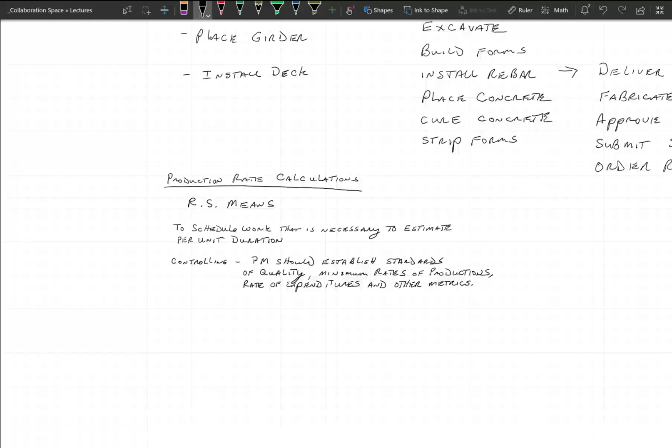Especially because in Part C, our three trials all had different temperatures, so technically you've got to do all the calculations for each one since the temperature's different. How did we get something that changed that much? We had one trial with 19, 20, and 22 - someone must have had hot water. Next time we should get a really big beaker we can just pour it all out of, I guess.

Cool, I suppose, that's not impossible. Hydrostatics - new lecture. Cool.

That's this thing. All right, anybody have any crazy ethics questions before we start, or anything else that's complicated?

No? Why, I can't understand. So there's four electrical students that are finally going to show up on time. That many have been missing? Yeah, because they were supposed to go to the lab at 9 o'clock and come to the lecture at 10, then go back to lab, but then their National Electrical course appears on their schedule at 9 o'clock, and no one paid attention to that.

So I literally was like, okay, look, we've got to get this sorted out. So I just sorted it with Mr. Havens, and we've got to do that bit yet too. So what did I do with my notes? I grabbed the wrong set of notes. This is going to suck. Okay.

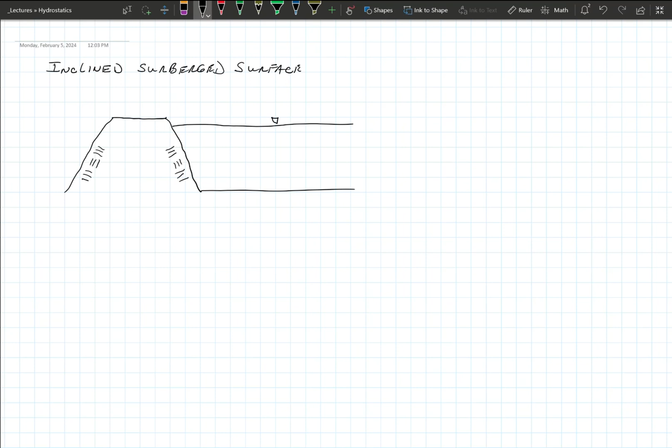So we've got water over here. We've got some height Z. We have an angle theta here, okay, which also, by the way, is the same theta down in here. So all that fun stuff you learned in geometry is coming to pay off, and it's going to haunt you until you're old and gray if you don't remember those things. All right, and what we're looking at is the water acting on...

Oh, perfect question, sorry. Oh! I want everybody's...

Should I finish? You can finish. Oh, yeah. No, sorry.

Just watching Leo over here make some of the nicest drawings.

It's funny, I love my Surface, but the Surface 8, the pen became sloppy on inclines. My old 4, I could draw perfectly straight inclined lines, and I don't know why I can't do it on this one. I usually want to use a ruler, but it didn't want to play with me today.

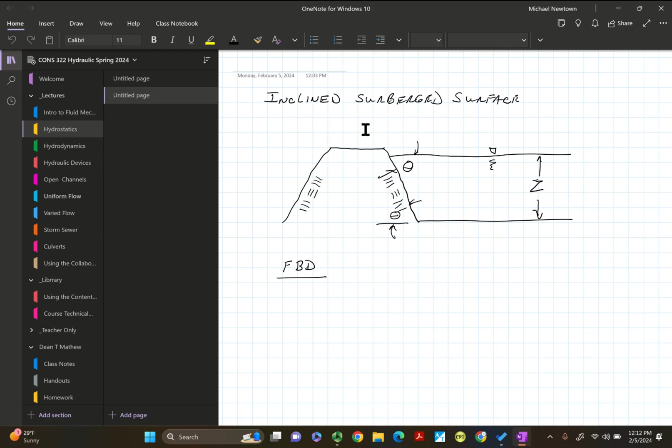Yep, I want my ruler in the world's worst way. Go away, it's not going away. Something that I did this morning when I was in the interviews with the dean. Just didn't want to shut down properly. Yeah, does that get a little complicated? Hey, why? Don't ask me.

All right, so any job worth doing is worth doing right. So there's our inclined surface, okay, and that's 60 degrees off from there. Actually, I'm going to put it inside so we don't get confused with all the other arrows. Okay, now we have point A here, which will be the base, and we got point B up here, which is the surface of the water.

All right. Now, I know Dr. Regal likes to have spreadsheets in colors, but I really like to have other things in color. So anyways, we know we're going to be perpendicular to the face here, right? That didn't go, that blue? Yeah, okay.

So there's a pressure, right? And we're going to keep going up along this, but I'm going to cheat, okay, just for drawing's sake. So if this is 30 degrees, our pressure is going to be doing this the whole time, and it changes with our depth. And just like with a vertical surface, we'd expect it to be less on each of those. So we literally got all our pressures at some depth Z.

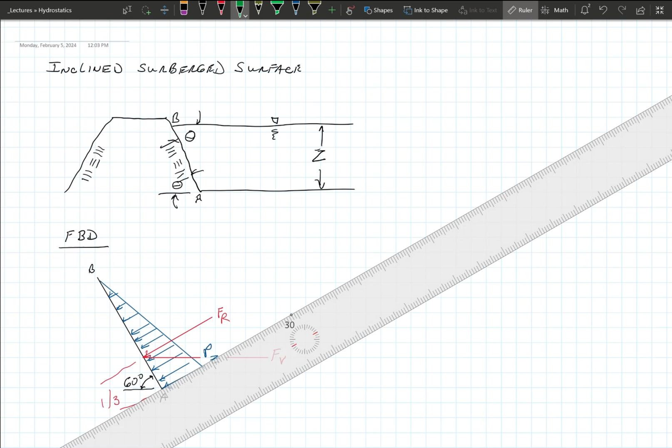Okay, all right, let's get this a little higher on the screen so I can draw. So we come off point A and we go up to point B. Okay, and Z here is equal to L sine of theta. Okay, sorry, I did that wrong, I want the L first. L is this distance here. Okay, so this is 1/3 of L off the bottom.

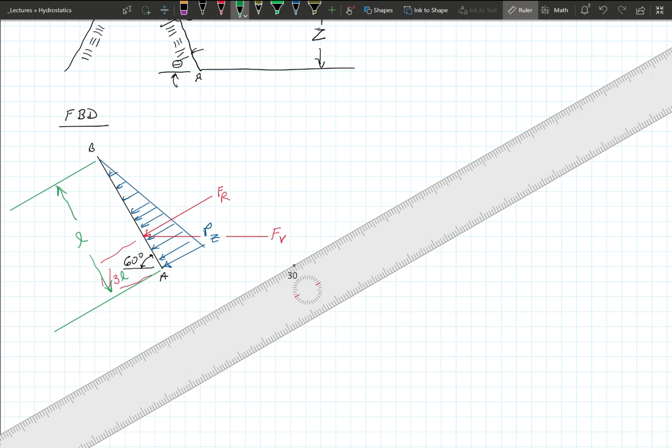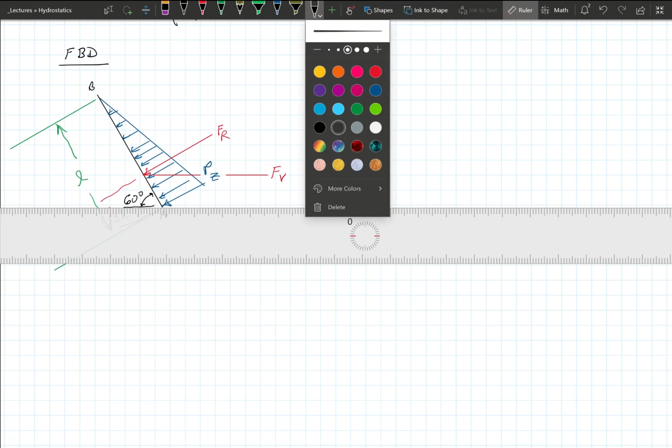All right, now I got to get... Oh, we need another color. And just in honor of Dr. Regal, we'll use purple. Yeah.

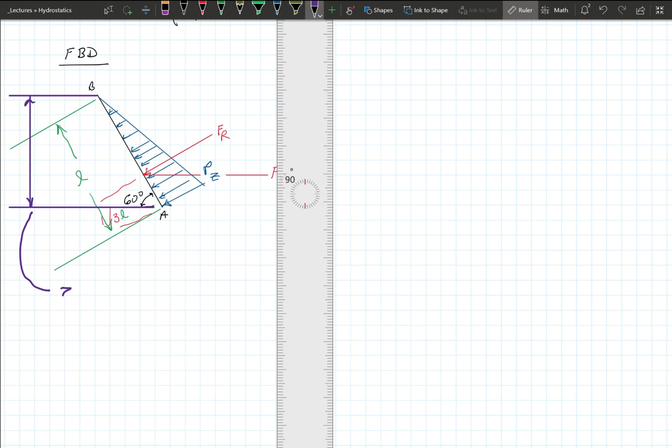And this is going to get messy, so I'm going to come down here. Z is equal to L sine of theta.

Okay. All right, so what's going on here?

Ideally, we have two forces that we can come out of this pressure stuff with. I'm going to show you some equations here in a minute. We got all the dimensions that we really need to have. There's one thing missing, though. Anybody thinking about this from a purely static standpoint?

So we got a weight of water at that point. Now, does that look like we got all our forces and everything that we could possibly account for, reaction-wise? As long as we're on this planet, it works.

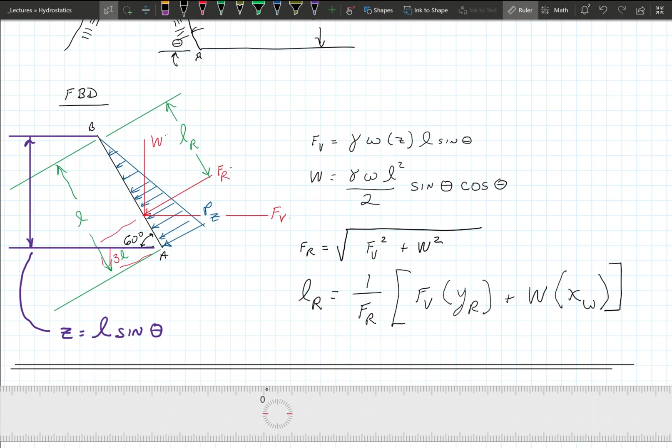We're going to, oh, this is a good question. I asked this in height construction, so half of you will get it. This is the best way to tackle this elephant, one bite at a time.

Okay, so we're going to do submerged surfaces. We're going to do vertical, we're going to do incline. So we'll get some practical experience for this.

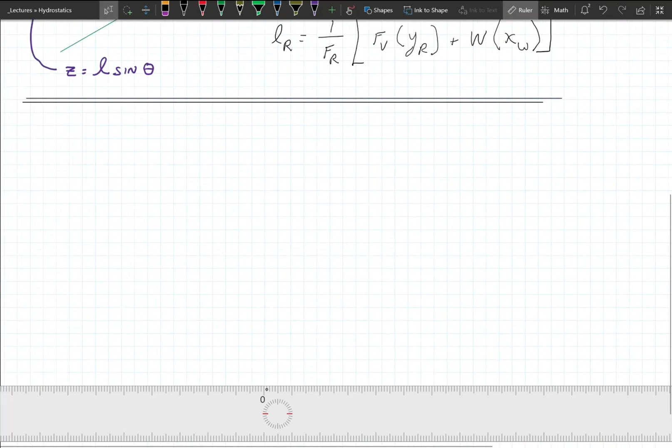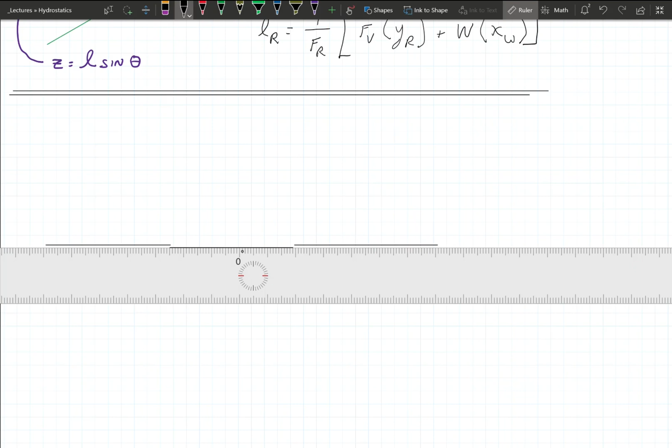All right, let's try one here as an example. So... really? Can't make a 90? Fine.

And we are going to be 20 feet below.

Glass window. Oh, and yeah, this one's going to be fun. Salt water.

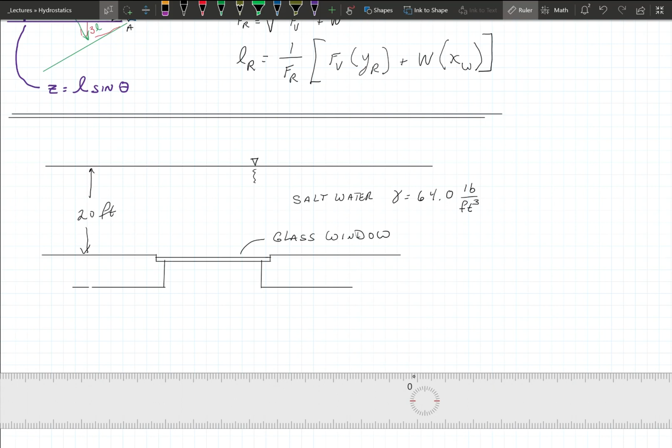Reminds me, Dr. Regal, remind me after we get done here to tell you about the geologist I watched the other day on the formation of salt domes in the Gulf, on the Gulf Coast. Really cool. I don't remember his name right now, but I got him logged onto YouTube. So it was one of those, YouTube just presented him to me. It's like, I'll watch that. And when I got done, it's like, that's intriguing.

All right, so we got a window here that's 18 feet.

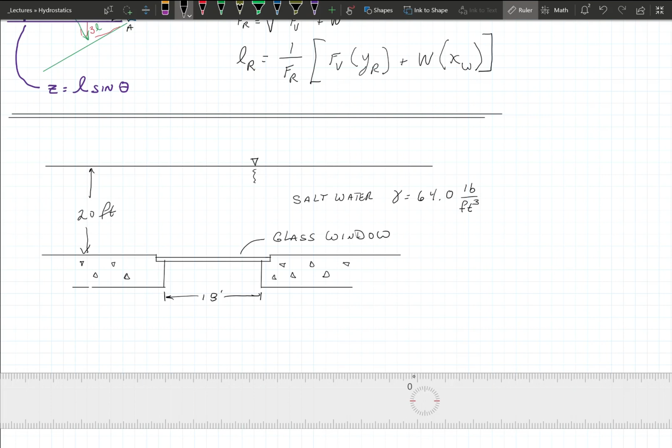All right, now, and you guys need to know something about this because we definitely need the areas out of this. So think about this window sitting in the bottom like so.

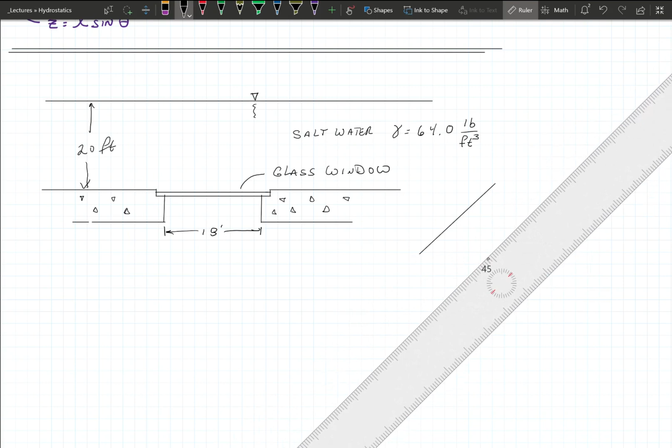Oh, get out of there. I'm having way more fun today than I thought with this. 18 feet, yep, so we're 18 feet here, but we go back 16 feet there.

Mind you, I would never purposely build this structure. Somebody may want to, but I wouldn't. Why not? I don't really care if the whale's over my head and I'm looking at it, and if the glass cracks, I won't be there to appreciate it. So, no, I'm not designing this, but it gets the point across. Okay? So...

For, oh, that's a question. Okay, oh! There goes the time. Imagine there's water in this and there's pressure on the glass. If there's a whale in the tank, does that increase the pressure on the glass?

No. Well, then why does it matter if there's a whale in there? Because if the glass cracked, the whale's going to come through that hole, and I'm telling you, that whale ain't going to fit. It'll plug up the water, so there's probably a chance of surviving, but the whale's going to be mush.

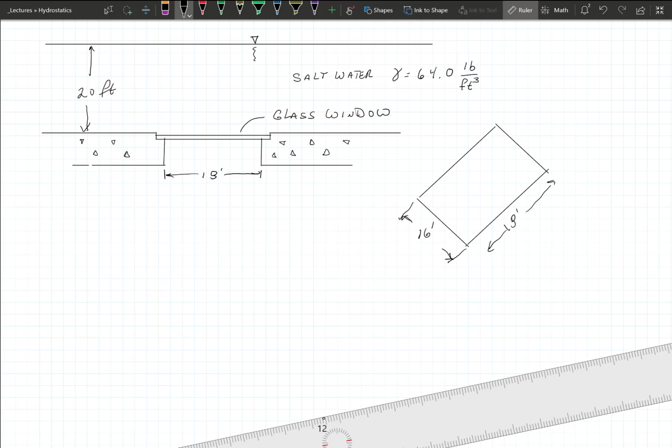Find force and the center of pressure on the glass.

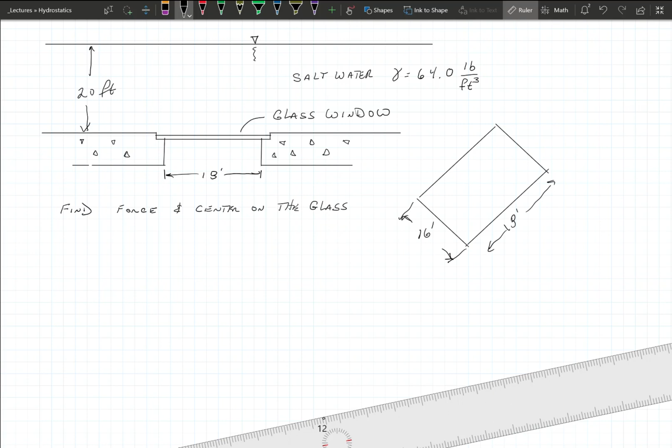Okay, oh yeah, this is my favorite example. This is the one that goes step by step. So guys thinking logically, here's the way to do this. First thing we're going to do is go find the force, and we're going to use FR because that's our resultant.

And we're going to put it in as this. Okay, and the reason I gave you the salt water as 64 is because you know that - if you used 62.4 you'd be off by something. But in the world of engineering we put factors of safety in, so you're probably going to be okay. But you might as well use the right numbers, so 64 pounds per cubic foot.

Remember the cubed - we're going to multiply it times Z, our depth, which is 20 feet, and we got our 18 feet times our 16 feet. Recognize that specific weight times Z is our pressure, and that the length times the width of the glass is our area that it's acting on, right? No violation of statics there so far, just some weird units to get there.

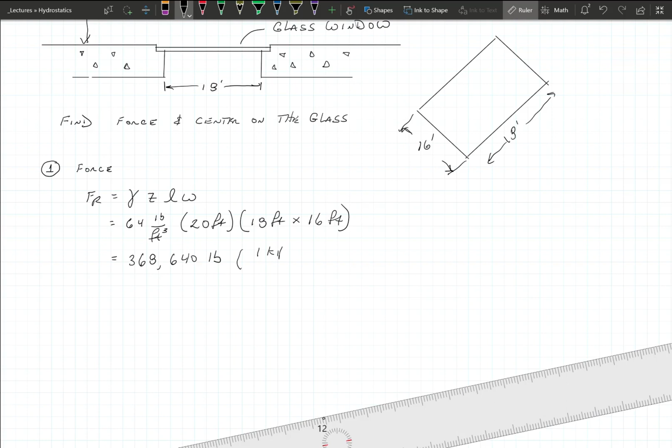Now, to keep you consistent with the world of engineering and the civil world that you're in - I used to gripe about this and then I gave up - so 369 kips. Something you can relate to? Still a lot of water overhead.

So if I have a force at the center of that glass, it'll be 9 feet in from one edge, and then on the 16 foot side, 8 feet in. That's where the center of that force is. Do we wind up getting a beam reaction that we can calculate?

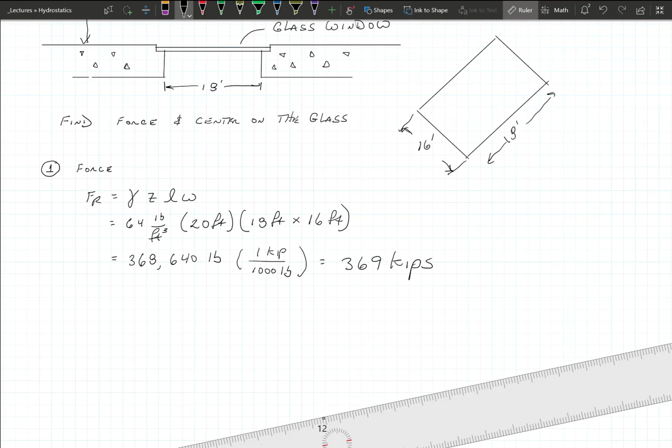So just think about this for a minute. FR, and we're 18 feet this way - can we calculate the reactions on each end? Yeah, in this case it's really half of the 369 kips that the concrete has to resist.

And then you can go even further and start thinking about it from the 16-foot way. Now I guarantee you, twisting that 90 degrees and calculating the other way, it's going to be stronger just to calculate the 18.

But as long as we're having fun in engineering here - no one ever puts the grand picture together, it just pisses me off all my life. One 18-foot beam's cool, but when I got a big plate in there, I got to go 16 too. I got to check that one too, so do your due diligence.

It's going to take you 2 seconds to do the math, but you check the other way to make sure that one's as strong, and whichever one's the dominant one, design to that one. Because why make somebody else's hell? Oh, on the 16-foot wide we only need 4 inches of concrete, while on the 18 foot side we need 16 inches of concrete - why would you make them form something in that weird shape? Don't. Consistency - make it simple, make it easy, use the largest thing to hold up everything, call it done.

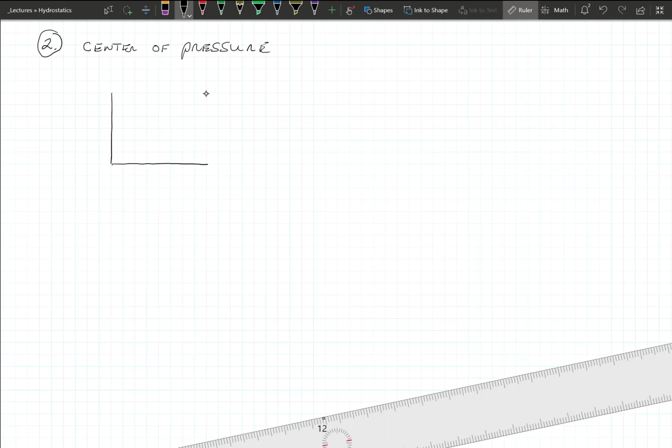I think I already gave this part away, but we're going to have fun here anyways. So we're 16 here, we're 18 feet there. So we're literally right there. Okay, makes sense to everybody? That one wasn't too hard to calculate.

And in the process of biting off big chunks of elephant, this case is easy to take care of. Yeah, drowning in seawater of - well, you know what happens in aquariums, right? All those animals excrete excrement out into the water, and they actually put divers into those tanks to scrub the algae off the side of the tanks.

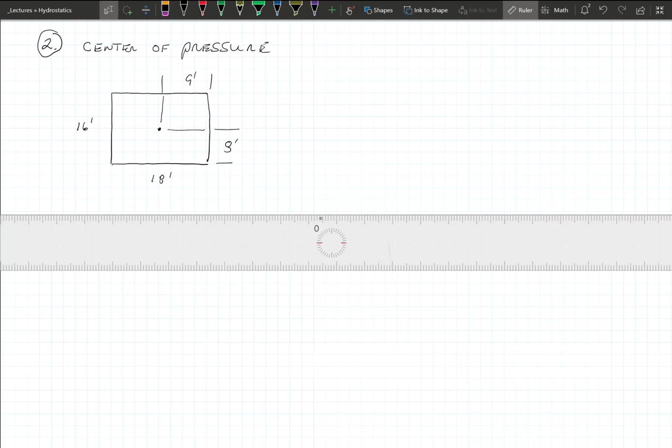Okay, so far so good. Let's do - oh yeah. We doing time here? We got good time.

All right, no one's ever built this structure in their lifetime in engineering. And the other bit is, might as well get this. And there's our concrete.

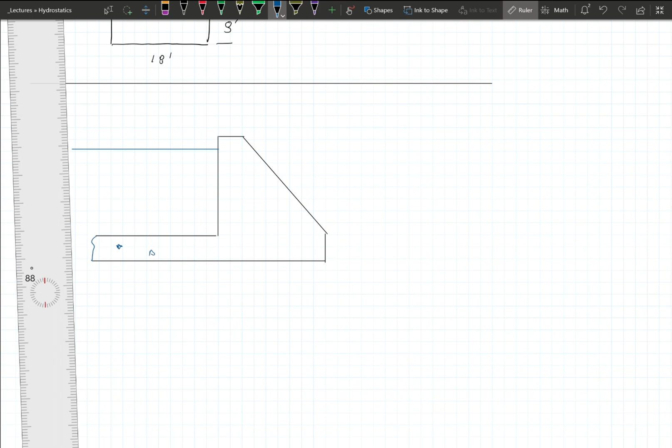Kids have all survived the whole harassment in your freshman year. What's the difference between concrete and cement? Yeah, cool.

All right, so we literally have got a Z depth here equal to 25 feet.

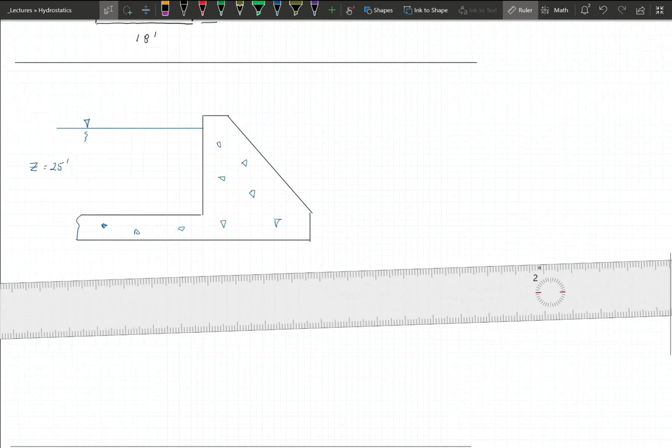Actually, I know how I got onto that YouTube site. I was looking at Lake Shasta in California. It's getting to the point where enough of that atmospheric river is dumping rain there. That is like 80% right now. And usually at 72%, they start opening the spillways, so they're concerned that the Bureau of Reclamation isn't doing their job well. So, all right. Anyway, so then I was like, oh, what's the next one here? That's cool. All right. We need to deal with some things here.

And all right, so remember, it's a triangle. So we're going to come up to 1/3 off the bottom. And that's going to be YR, but we got a YC to deal with.

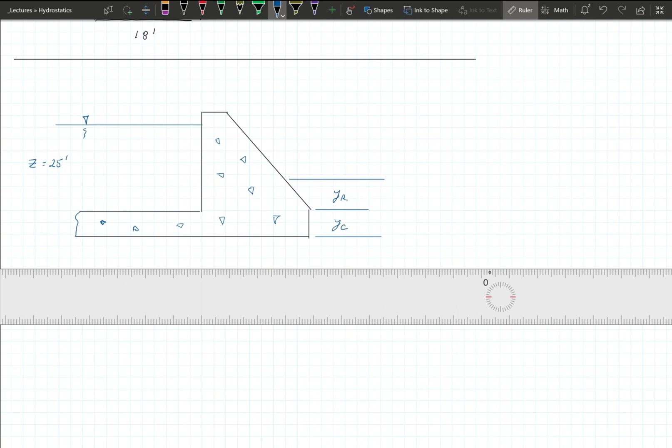Okay, and oh, I did some fun with this one. Cool. Sorry, I always told you guys I'm the one more excited about this class than you are.

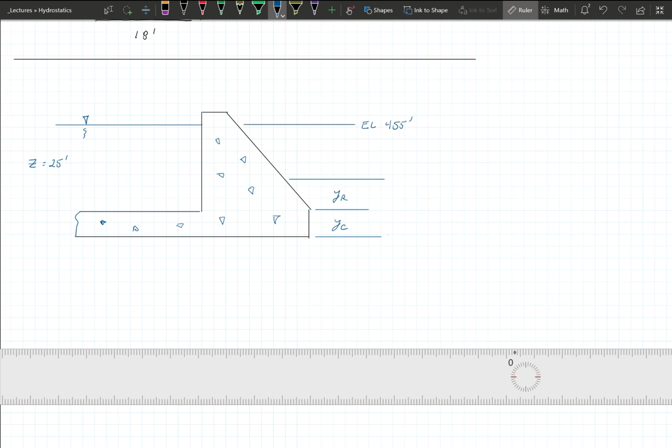455 feet in elevation. Is that water surface there or no? That's water surface, yep. Okay, our elevation here is 430, which, if all's right, that should be the 25 feet.

No. 25 feet. No, it's up here, wrong place. Elevation here. Wait, there's no water on the right side of this. No, there's no water on the right side of this. 30, 25 is 55, right? Yes.

Why put it down there? It's just weird, what the hell was I thinking? There's a reason sometimes I don't redo my notes.

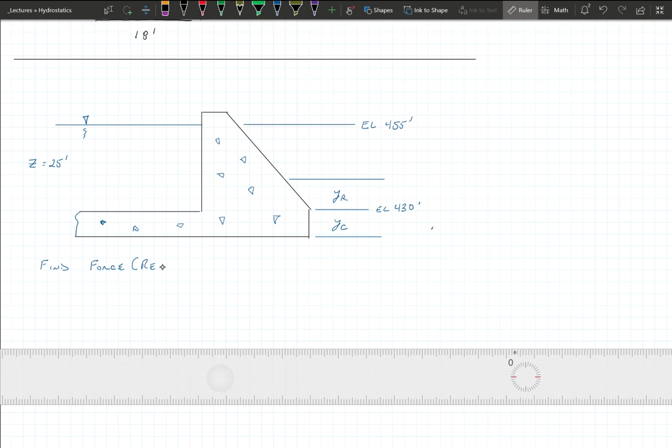Okay, so what are we looking for? Find the force, or the reaction, depends on, or the resultant, that's the word I want to use. Okay, and the center of pressure, so COP. Oh, and this is fun, COP per foot of dam.

New phrase. Ready? Okay. Some days I am, some days I'm not. I just don't have any idea how Wednesday's going to work.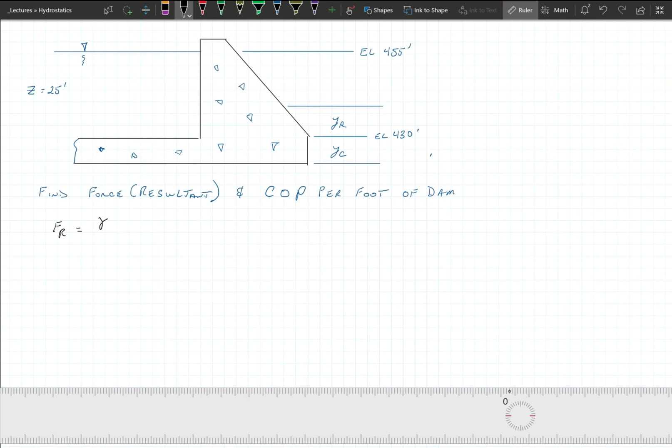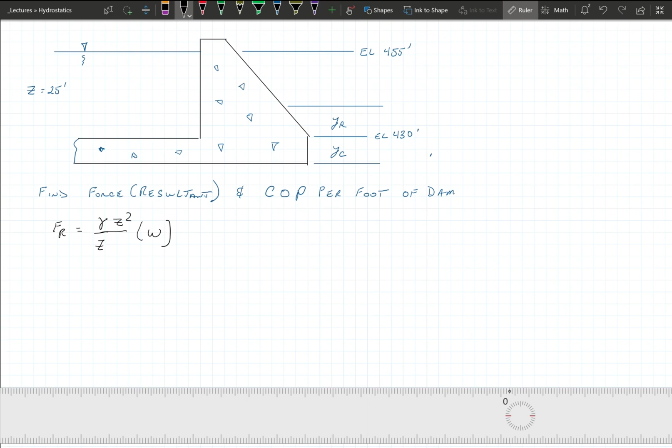I know, all right, so equations are things we know. All right. Oh, and it's fresh water too, so we're not going to mess with people's minds on this one.

Sorry, that's not a Z, that's a 2. Yeah, so was I, I was looking at it going, what the hell is that Z doing in there? 25 feet. Okay, and oh, I got to square that one. And we're going by 1 foot. Okay, and we're going to divide this part by 2.

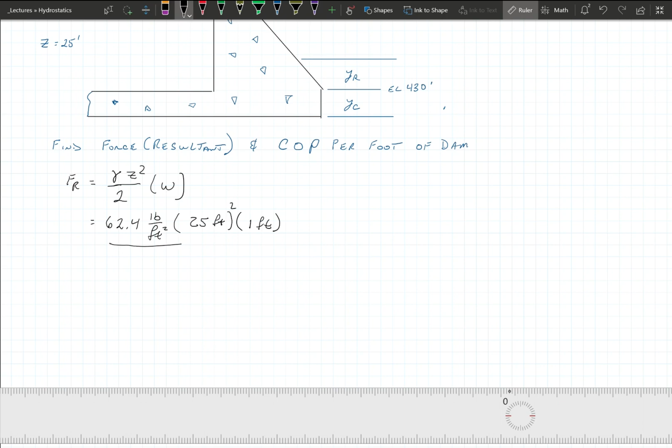Okay, so if you do the math, we got 19,500 pounds per foot, or 19.5 kips per foot. Okay.

Well, the 1 foot, that's the cool thing. The problem basically says per foot of dam. So for every foot over, that's our force acting on. So what this gets us the ability to do is calculate how much concrete we're going to need down the road per foot, and figure out that the stream is 25 feet wide and then calculate it. Okay, otherwise, you need to know the depth area in the back. Now, if no one's ever said this to you before in engineering, I apologize, but when in doubt, you're allowed to assume things. Document it, though. So if they didn't give you the area of the dam or the width across there, and you know it's 25 feet high, you can put in, I assume, 1 foot. Okay? And they can't take you to court for it. Okay? No, because you wrote down what you assumed. They didn't tell you. Oh, right.

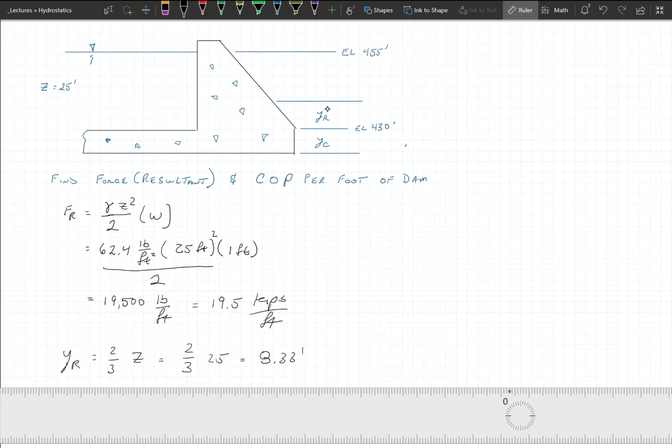And make sure you identify things. 8.33 feet. Or if you're coming where I put the YR here, actually I should do this way. That was my YR. If I put it down here, then I just want to come back 1/3 up from the 25. 1/3 of 25 is 8.3. That's the whole thing.

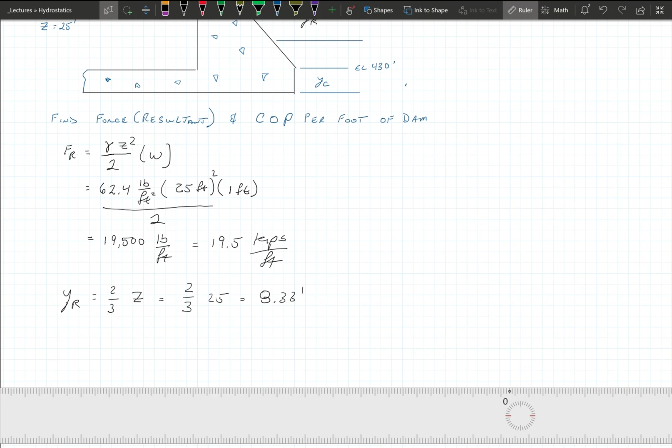Yeah, that's what I was thinking. Oh, somebody do the math. I could have it wrong. Because that wouldn't make sense where I put my YR down here. Yeah.

1/3. Cool. And I prefer to do it off the bottom because that's the one thing I know. The bottom is always consistent. The elevation of the water changes, and that would be a problem. Okay, thank you.

Cool. So far, so good? Anybody scared to death yet? No, not yet. It's okay.

Now, Wednesday during lecture, I'll get into inclined surfaces, and then we'll go to the lab that afternoon and mess around with that. The best piece of advice I can give you right now is get the lab instructions out, read them, try to understand them well in advance. Once we get the group of people out of there, we will actually explain the details.

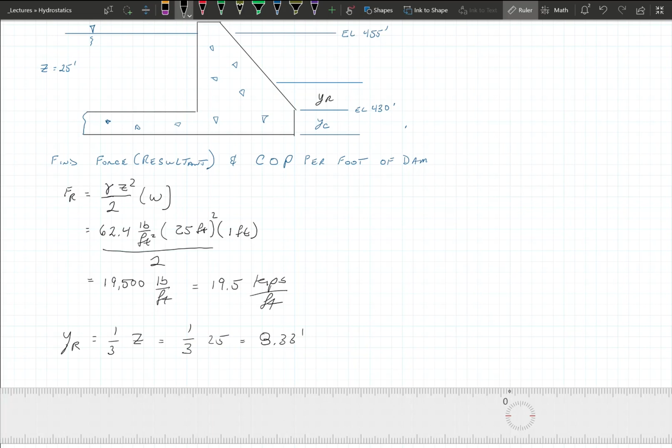So dress appropriately. You don't have to put a shirt and tie on, or slacks and a nice blouse. But act like you're decent college students that I think you are. Put it this way: be as respectful as if your grandmother was showing up to see what you're doing. Because I don't know what kind of questions they're going to ask or what they're doing. Nowadays, that might not mean anything either. Some grandmothers are pretty. Pretend it was like my grandmother showing up.